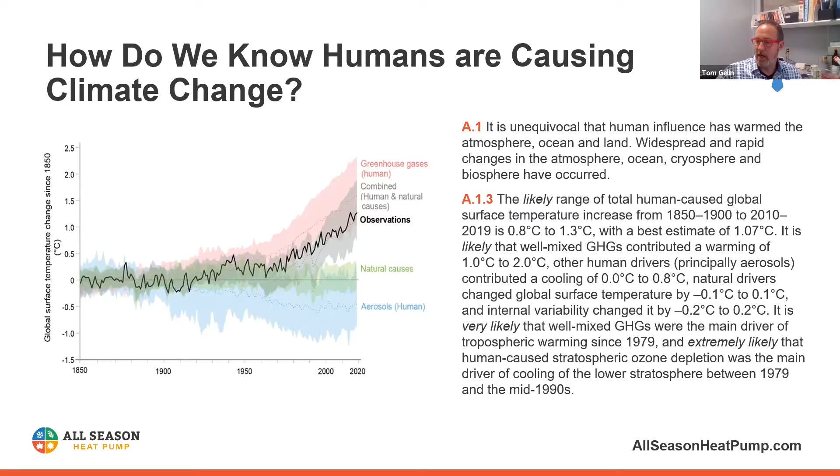So the most conclusive report by IPCC thus far, and more data is going to come from those folks, that was raw data, and then next steps, and there's a lot of information on the IPCC site. So in order to have any context on the IPCC, we've got to know about greenhouse gases. So all this information is very researchable, a lot of great stuff on EIA, which is a very comprehensive government report on the use of fossil fuels and electricity.

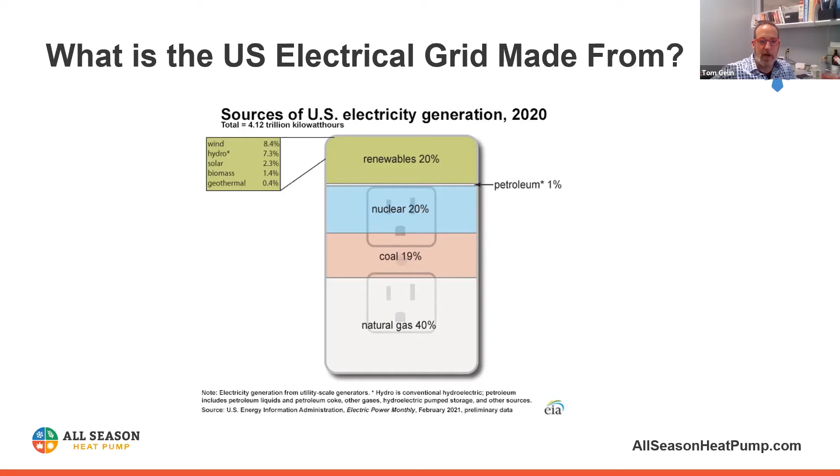So if we look at this slide now, we've got our US grid, right? So when you plug in your computer or your light or whatever it is, the US average is that 20% of that grid is made up of renewables, which is really exciting. And 20% of it is also made from nuclear energy, which may surprise you. Maybe not so surprising is that we still have quite a bit of coal on the grid, and that 40% of the grid is powered by natural gas. So renewables and nuclear energy create no greenhouse gases, and 60% of the grid does. What makes up the grid as far as the fuels that we use to create electricity and just to straight out burn them, like for example, natural gas is what powers the furnace in my home.

If you live just a few miles to the north, your furnace may be powered by oil or LP gas. And you'll notice that in this chart, the amount of greenhouse gases created by different fuel sources, you can see here, hard coal is nearly double what natural gas is. Natural gas has been a wonderful thing to prevent greenhouse gas escalation because it is a cleaner fuel. And when people say natural gas is a cleaner fuel, this is exactly what they mean.

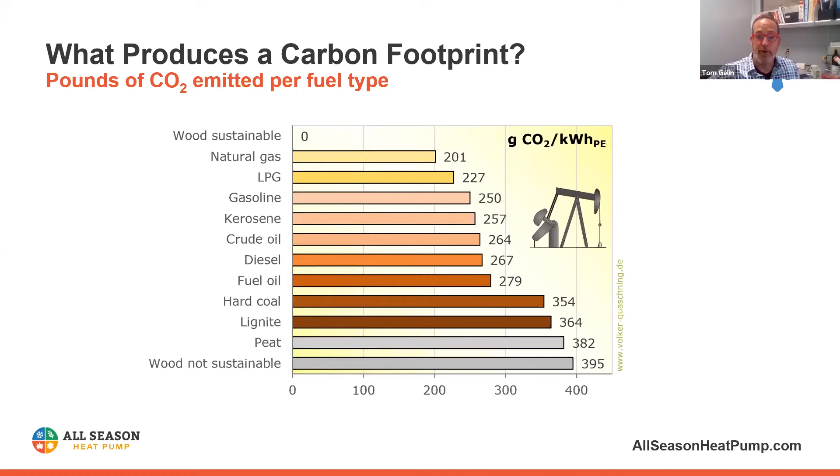And it's sort of a fun fact that certain types of wood, if you have a wood burning stove, is considered no greenhouse gas because the wood grows back. Okay, so now we know where this greenhouse gas comes from: burning fuel. Let's look at all the power in the United States.

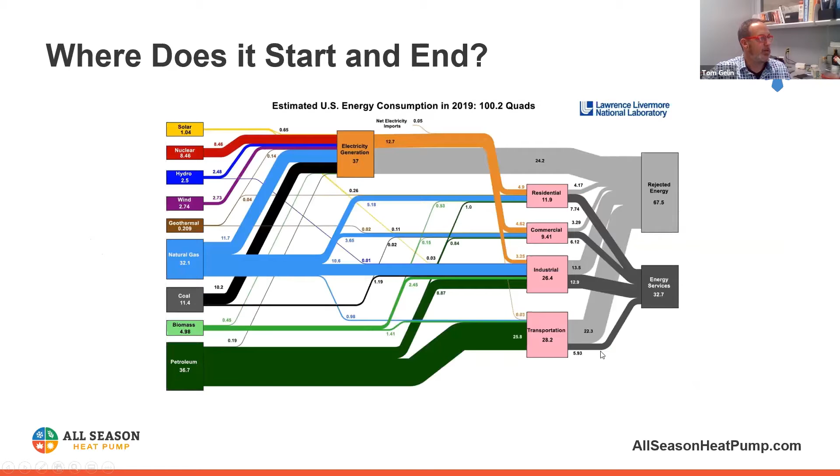There is some cost difference if I have to replace my car. And so there's some cost difference between this Model Y, which is a more expensive Tesla than some of the others. But there is fuel savings every year. But we're talking mostly about carbon footprint, and we're cutting our footprint in half. So in that big grid that we looked at a little while ago, we're making some progress down here in the transportation section, and maybe not as much in the residential and commercial sections.

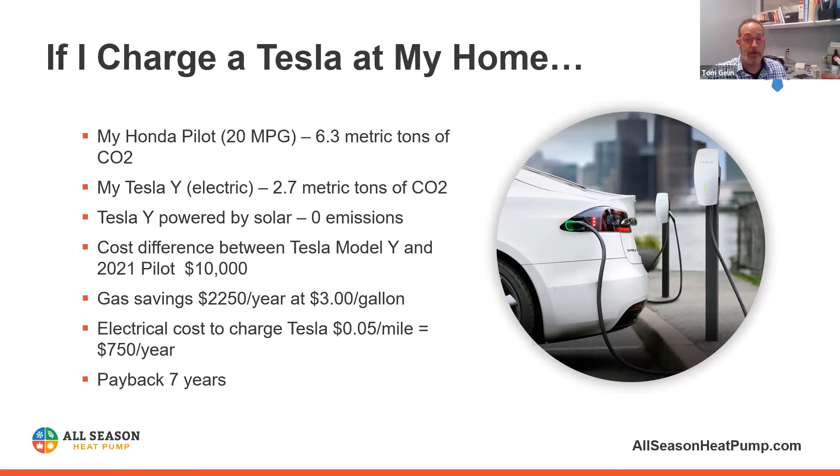So going back, okay. And it's interesting that it costs you about 5 cents per mile to drive a Tesla, which is pretty cool. And I'm not advertising Tesla, whoever's electric vehicle, their data was just easy to get my arms around. So there's a payback to it. It's long, but it's there.

Okay. Now we're going to talk about heat pumps a little bit, and keep in mind, I'm going to come back to this with a little more in-depth on this, where these numbers come from, because it's not completely transparent. These numbers are based on an energy model. An engineer friend of mine named Jeff has an Energy Star house. And in order to have an Energy Star house, you have to use the geothermal heat pump, which is really cool, and compared it to a code compliant.

So if you're going to build a home, you have to have minimum a 92%, maybe it's 94% now, furnace, and a 13-SEER air conditioner. If you do use equipment that's lower than that, you don't meet code, you'll have a hard time getting a permit. So after we boiled down the usage of the HVAC system, the heating and cooling, the code compliance system required about 6,000 kilowatt hours a year, and 266 therms. A therm of energy is 100,000 BTUs. So BTUs and watts are interchangeable through a conversion factor.

Whereas this heat pump that I've kind of got this picture of, and we'll see some more pictures in a minute, we required 7,600 kilowatt hours, no therms. So the carbon footprint here and here are very similar. There's some small reduction. And there was some utility savings. So there was a payback here, similar to what John produced with his solar array. So we're going to come back to that in greater detail in a little bit. Okay.

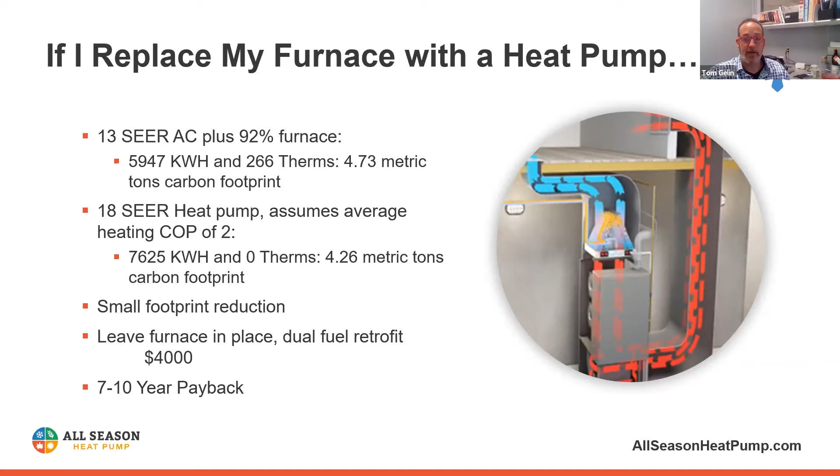What's interesting about heat pumps is the math is very challenging. And it's not challenging as in, oh, you need to learn differential equations. It's just challenging in the number of variables required to solve the problem. So for example, every heat pump manufacturer has different performance information. And even with the heat pump manufacturer, they may have different models, and then each size has different performance features. Of course, your fuel cost, if you live a few miles north of us, you might be using LP or oil, like I mentioned before.

That changes the equation on whether or not a heat pump makes sense for you. At what point do you switch to a backup? We're going to talk about backups here in a little bit. What's your actual loading on your house? Like, how much heat do you need to maintain 70 degrees or whatever your set point is?

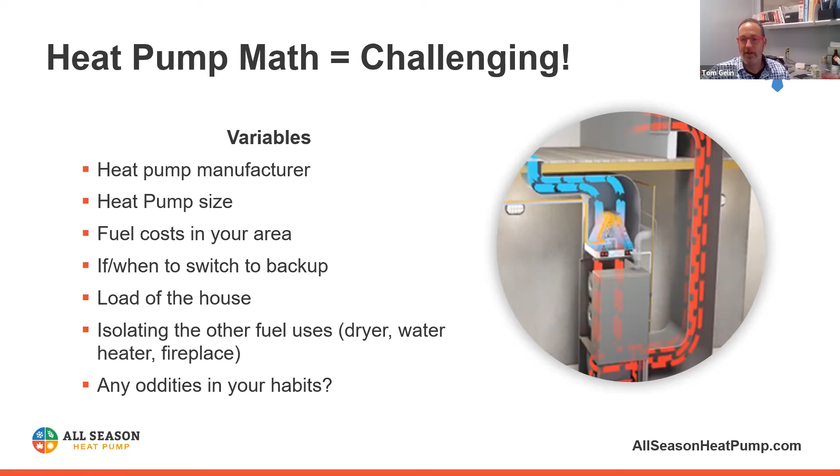Can you isolate your fuel sources? For example, you get one electric bill that has your lights on it, your microwave oven, and your furnace powered by it, and your air conditioner. So can you partition those out? Difficult to do. And then do you do anything weird like open up your windows in the summertime? That happens in my house sometimes.

Okay, so one thing to think of when it comes to financing long payback projects is if you use the business mindset of a 5-year payback or a 3-year payback, you may struggle. But when you're looking at a home improvement that has a 10-year payback, you can look at it 2 ways. 10 years is a long time, I might not live here.

The other way to look at it is, all right, there are mortgages out there that will allow you to borrow more than the value of your home. So let's say you bought a $200,000 home, you could get green mortgages up to $230,000 and use that 30 grand for home improvements. So as you're financing that home at whatever the low rates are, 3-4% or something like that, maybe even lower, you're getting a 10% return plus it's all post-tax. So quite a bit more benefit than what you can get out of the traditional savings mutual fund market.

So for a financially savvy person, this is a really great way to go, and it'll be a cash flow positive thing as long as you're in the house. And if you sell the house, if you drove past the house in the 70s and you saw solar panels on it, you'd be like, if I bought that house, I'd take those solar panels down. They're ugly. Now you see solar panels on a house and you go, oh, that's cool. And they're worth something. And the value sticks to a house. Same thing with the quality of the HVAC system as we become more and more versed in how efficient the equipment in our home is.

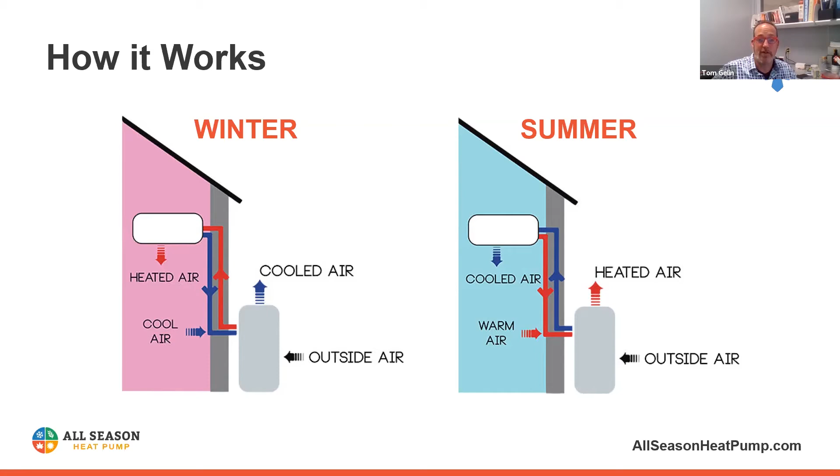I use the example in the summertime with a refrigerator. A refrigerator keeps your produce cold, and then it dumps the heat into the house. Then your air conditioner takes the heat of the house and dumps it outside. We're just running that process completely in reverse, but it becomes more challenging because the colder it is outside, the more energy it takes to create this refrigeration cycle. Basically, you're boiling the refrigerant with very cold air. So when it's really cold out, it takes more energy and it boils less of the refrigerant to make the process work. But that's a heat pump.

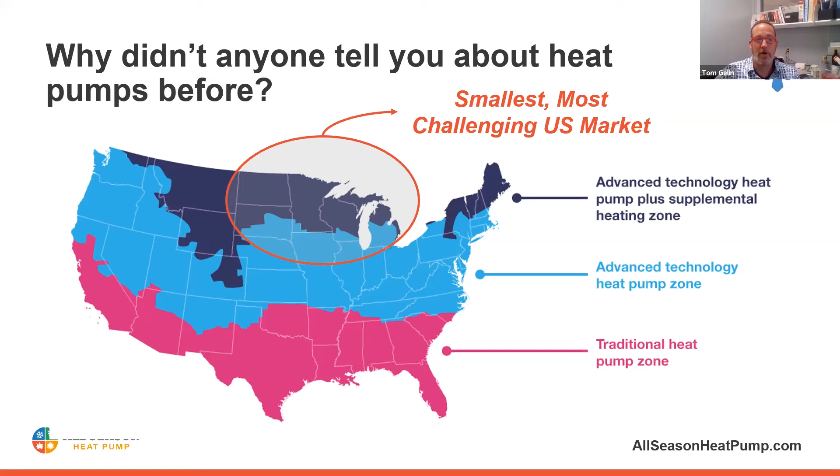Okay, so let's keep moving on. Because it's challenging, some cities have taken on climate action plans. I know there's some folks that are going to be looking at this from Ann Arbor. Minneapolis is doing a great job, in Dane County. In Milwaukee, there is a website that says, you know, we have a climate action plan, but their effectiveness so far has something to be desired.

Why are they doing this? Well, they recognize that IPCC, those leaders received that 42-page summary for policymakers saying, hey, if we don't do something, there may be negative results here in the not too distant future. And we have a window to do something about it. So they're taking some action.

Now, we have to look at some terms in heating and air conditioning that we need to know for background. So when you have a furnace, your furnace from the 1970s might be 80% efficient, and now you may have a furnace that's 94 or 99, all those different types of efficiencies. And that's like, wow, that is really efficient. You can't get much more efficient than 90 some odd percent.

But let's put a little context here. When you use electric heat, it's 100% efficient. There's no waste because basically there's no products of combustion. You know, in your home, when you burn gas, you have to take the flue outside, and that's loss. You're taking gas and you're turning it into heat plus carbon dioxide plus water. So that's considered the waste.

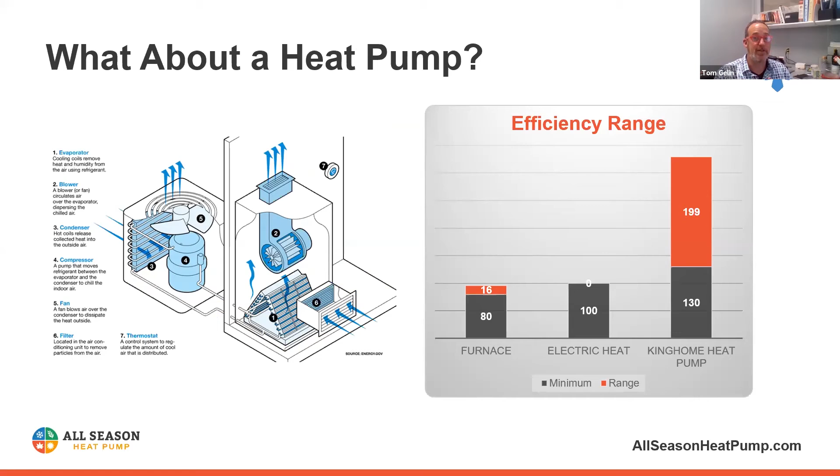So depending on the temperature on any given day, the efficiency of an air source heat pump changes, thus complications in the math. But as you can see from the previous slide, there's always a benefit to using a heat pump from an efficiency standpoint. We're not talking about cost standpoint because that depends on your fuel source, but from an efficiency standpoint, this heat pump's doing a great job.

What the government likes is the efficiency of this heat pump when it comes to fossil fuels. And so in Wisconsin, if you have a rated, it's got to be AHRI rated. We're in the process of getting ours rated.

It should be done in January. If you have a code compliant heat pump, and it's got to be this very high efficiency rating and this high heat pump performance level, they'll give you $1,000 towards your heat pump retrofit.

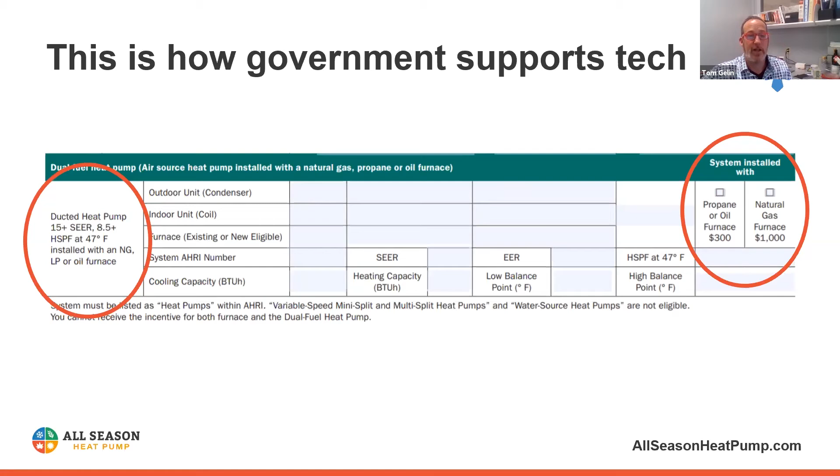Okay, now this next slide we're going to spend a few minutes on. I kind of half-baked modeled my own house. And the fun part about doing this thing is you never know exactly where you're going to land after you jump out of the airplane. And so some compelling things, some not so compelling things. This is just the raw math, and you guys can start making your own decisions.

So this first example, hey, Eric, is my mouse showing up here? Do you see it? Or do I need to move it over here? Sorry about that. Oh, yeah, I am seeing it right now. Yep, right on the top. Okay, great. Okay, perfect.

All right, so my home, it was built in 2008, so it's 13 years old. When you get your gas and electric bill, it's all the gas in your house, right? So your hot water heater, if you have a gas dryer, if you have a gas fireplace, any other gas appliances, it's all lumped into a big pile. So we made some assumptions and figured out that to heat my home over the course of the year, we'd use 800 therms. So 800 times 100,000 BTUs per.

So that's the therms. A therm costs about $1. It goes up and down. Last year was subsidized because of the pandemic. And the carbon footprint is also something you can pull off the EIA websites, for how much is the carbon footprint of a therm of gas. So here to heat, I'm producing 9,300 pounds of CO2 every year.

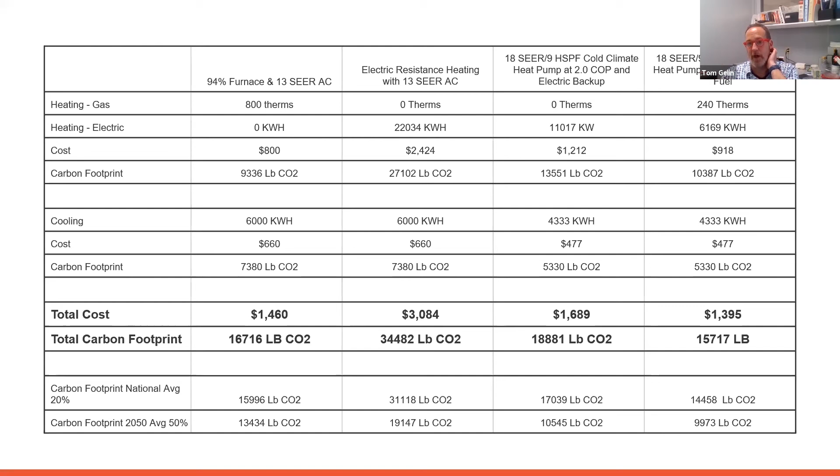If we go to dual fuel, so same heat pump, except in the wintertime, I'm going to leave that furnace in place, and when it gets really cold outside, I'll use the furnace and turn off the heat pump, just for efficiency. In this case, we only need 240 therms to get through this iteration. And the switchover temperature in this model is 17 degrees. So it hits 17 degrees outside, we turn the gas on. Above 17 degrees, we're using the heat pump. Below 17 degrees, it's gas.

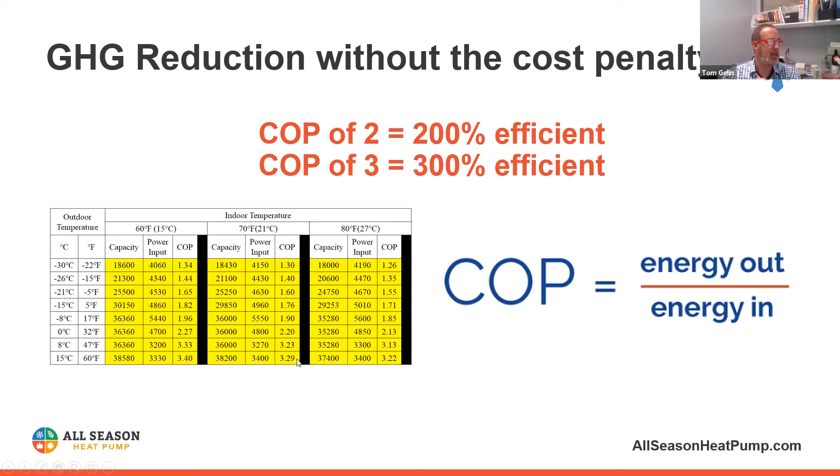Okay. The electric usage for heating goes down from 11,000 to just 6,000. What we've done here is taken a look at that COP average from this chart before. So the COP average, if I cut out the minus 22, which really isn't in our bin data, minus 15 happens a couple of hours a year. We spend a teeny little bit of time at minus 5, but if I cut that out and just look at 17 degrees up to 60 degrees, then the average is maybe even a little bit higher than 2.5, but that's where I got that number from.

Okay, so as we boil this all down, in the summertime, we're more efficient in air conditioning mode, and we have actually reduced by not a small amount the carbon footprint, and we've also reduced our operating cost some. Now, as our grid becomes more based on renewables, let's say when Wisconsin hits the national average of 20%, these ratios all change. Our carbon footprint drops more significantly in the heat pump model than it does in the gas model.

Now we're targeting 50% renewables by 2050, and some municipalities are trying to get there by 2030, which I think is awesome. You can see that the impact of having furnaces is greatly diminished, whereas we've taken out 60% of the carbon footprint by having this heat pump. So that's part of the link in the chain we're trying to create. Okay, so that's the math. Now, again, any of those variables changes this entire chart, which is probably why heat pumps are a little bit more difficult for adoption and why we need more education.

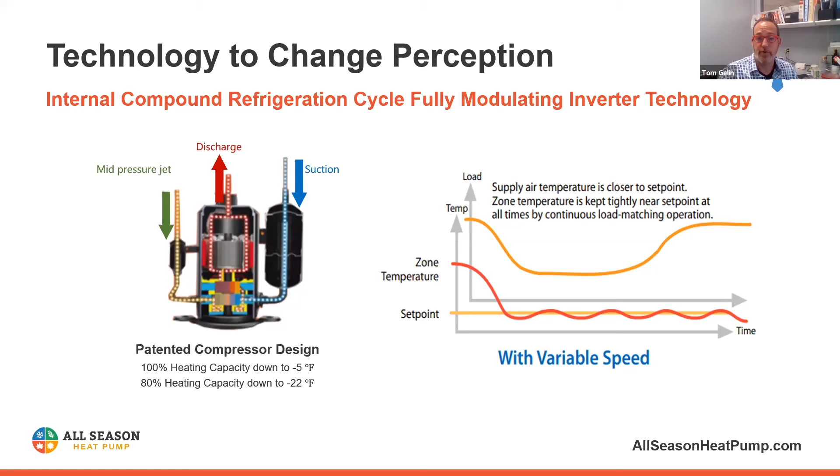In an all-electric cold climate installation, if you have propane or oil, using a straight electric system is still more cost efficient than using propane or oil because of the fuel cost. So when it gets really cold outside, this little heater that's built into the top of the unit comes on and supplements the already operating heat pump. When it gets cold outside, you'll need some backup heat.

Now notice that 2-ton unit is extremely efficient. And we'll talk about that more for multifamily in a future presentation, but you almost don't need any backup. Our design temperature in Milwaukee is -11. Really, you shouldn't need any backup heat. Could you have it? Sure, if you want to. But you can see that even at -22 degrees, some backup heat, not enough to ruin your electrical panel, is required, but it's not that much. Okay.

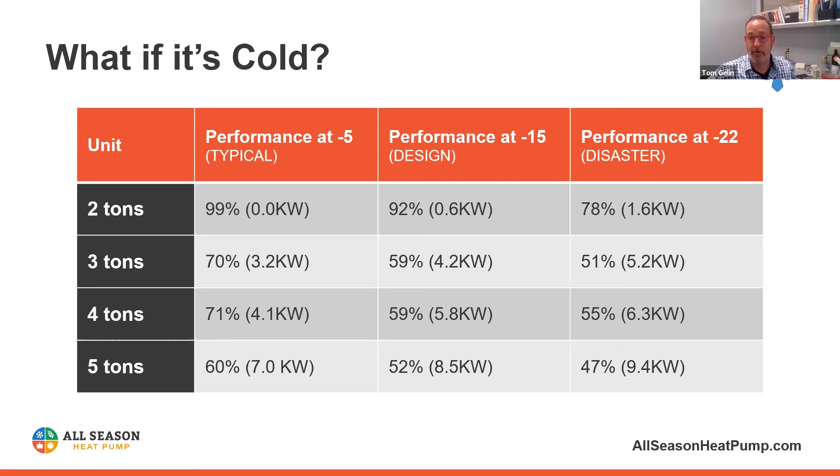Alternatively, instead of a straight electric system, you probably have gas pipe to your house, and this is kind of a good drawing of it. The furnace stays in place. You remove the air conditioning coil from the top, and you replace it with a heat pump coil. The only difference is the heat pump coil is built a little bit more stoutly because the pressures are higher. You take your boxy air conditioner off, you need a stand, you put the heat pump outside, and that's it. So it's a one-day job for a contractor.

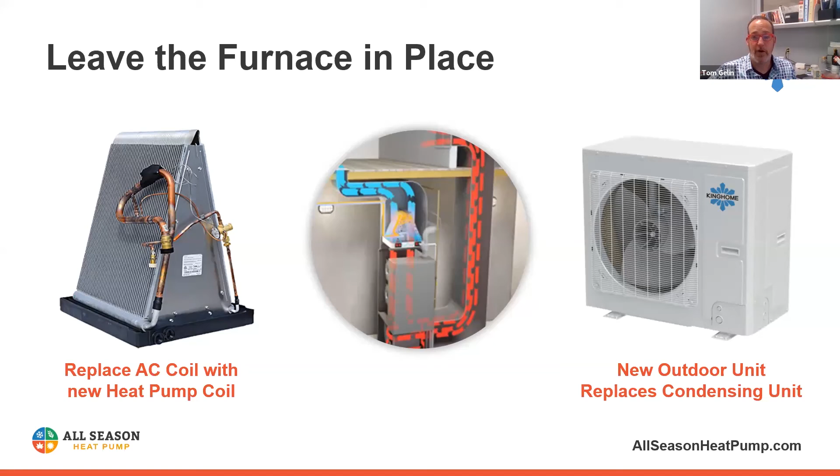I would also share with you that this heat pump on first cost, if you compare it to a similar efficient air conditioner, should be less expensive. Okay. If your house has a boiler or you're going to do your 3-season room, this Ultraheat compressor from Kinghome is available in a multi-zone system.

So let's say you had boilers and you had a living room, a kitchen, and 3 bedrooms. You can put one of these wall units in every room and have it all piped to one outdoor unit, which has the same compressor in it and works the same way. Or for your 3-season room, let's make it a 4-season room. This can be used for one room and it'll operate year-round.

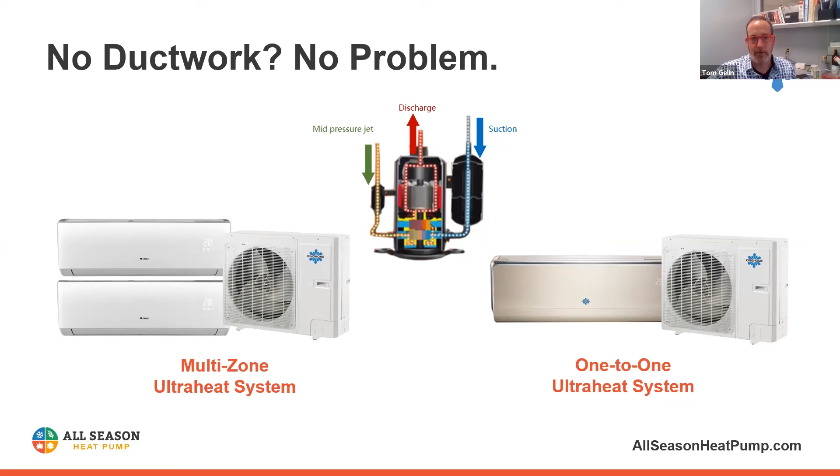Well, I can go to an electric dryer, and I'm going to need something for my water heater, and I don't want to go straight electric. What am I going to do? I'll go to a heat pump water heater.

And with that, I think we've come to the end, and it's, oh, wow, 50 minutes almost exactly. Love it.

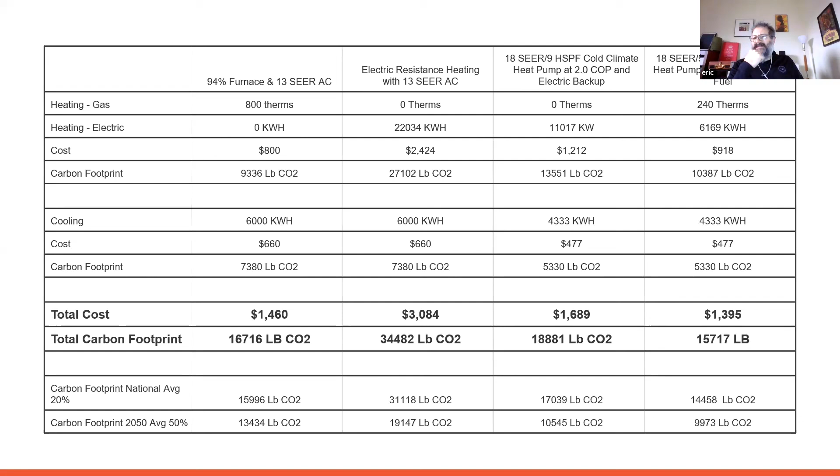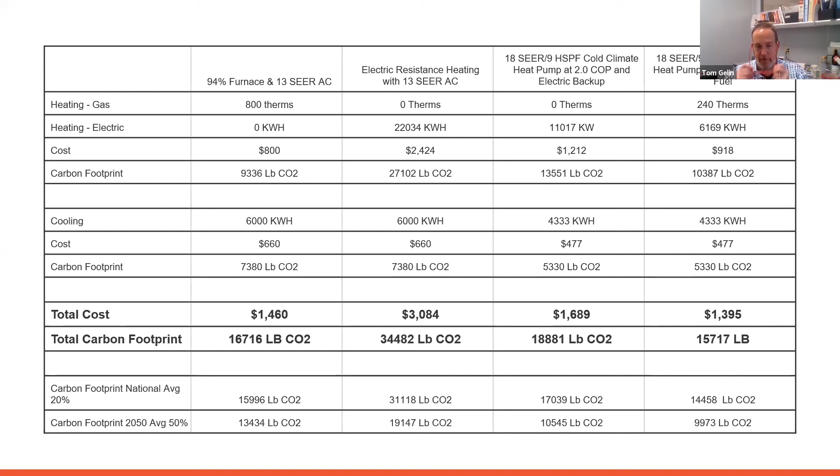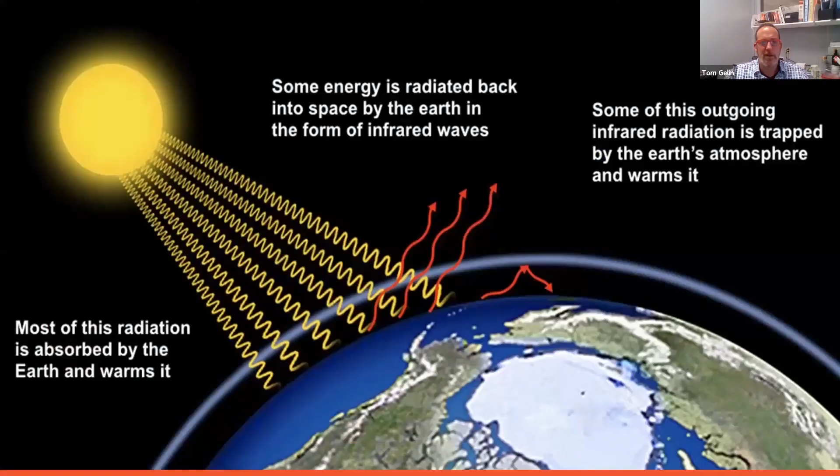All right, I think I get the gist of the question. Should I replace my whole furnace? And the answer is, it depends. So a furnace is a pretty simple device. Did I have a slide on a furnace here? I don't think I did. Sorry about that. So a furnace is a blower and a gas-fired heat exchanger, and there's an inducer motor to pull the products of combustion out of the furnace.

So you can go to a lot of houses where the furnaces last 20 or 30 years. In the case of a heat pump retrofit, how many hours are you going to be using the furnace? The furnace itself, the gas-fired part of it, not much. Then what's inside of that is an EC motor, electronically commutated motor, and a blower wheel. So in the event that your furnace died, it would be one of a handful of things. It could be the blower and the motor, but those EC motors, man, they last and last and last. And they're not particularly expensive.

For me, with my 13-year-old house, I'm leaving the furnace and using the blower that's there, because I'm going to be running my heat pump as long as I can. I'm barely ever going to be using that thing. Okay. All right. So we got another question here.

This is from Josh. If I were to change to dual fuel, do I need to change my thermostat? Oh, that's a good question. The answer is yes. It needs to be a heat pump thermostat. I'm not going to get into all the nuts and bolts of it, but somebody needs to take a look at the controls. Like in my house, I have a Zonefirst zoning system, so I got to make sure that it's heat pump compatible, which it is. If you have a single zone, yeah, you can change out that thermostat.

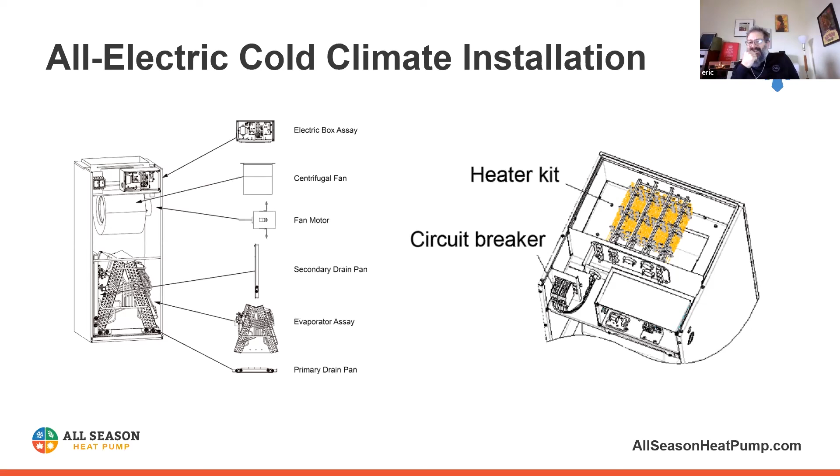That's all we have on questions. Tom, is there anything else you'd like to touch on? No, just look out for some seminars in the not too distant future. I want to talk about multifamily for sure, because that's a great bang for the buck for heat pumps, and how that can be applied for social impact. And two, let's dig into some of these heat pump calculations and see how we arrived at them, because you may need to do some of it on your own to justify. You may want to play the what-if game, figure out where your fuel sources are and how to apply it to a heat pump, and maybe find out that it's worth doing.

We did have one quick question that came in from Steve. Is there a HW coil option for backup, to pair with the radiant floor system slide you presented? Ooh, is there a water coil? That's a really good question. If you have a water coil, that implies that you have a boiler. And the idea behind this heat pump, hydro box, water heater solution would be that you don't have a boiler. If you had a boiler, similar to the dual fuel, you could have your boiler as a backup, in which case you would have your contractor see about putting a coil into that system. Usually a coil is for an air system, so I'm wondering about that. But you can also just email me the question, and I can handle that one offline.